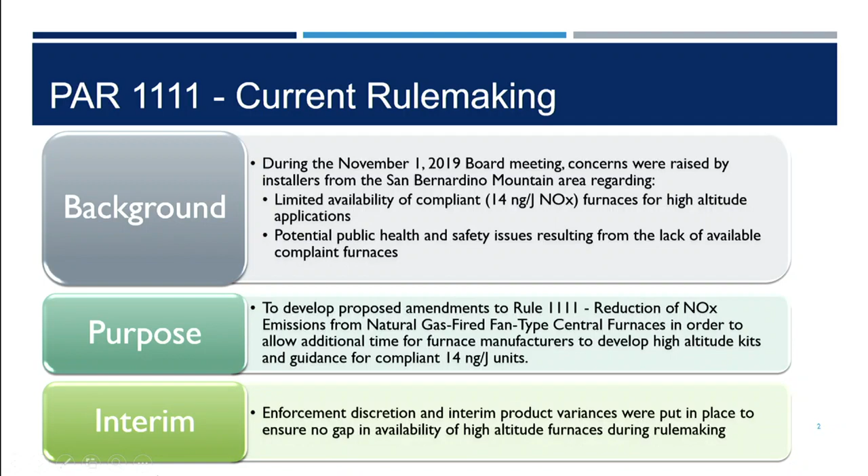So we're here to propose some amendments to that rule in order to allow some additional time for manufacturers of the furnaces to test and develop the necessary kits and guidances in order to operate these furnaces in high altitude areas. Just by way of background, so everyone knows, during this whole interim, when the final compliance date came on board October 1st, we did have some enforcement discretion, as well as interim product variances, I'll get to in a moment, that were in place to ensure there wasn't a gap in any of these areas to stay warm.

For those possibly not familiar with Rule 1111, we have regulated furnaces in our region for around 40 years, back to the late 70s. We established a standard at 40 nanograms of nitrogen oxides per joule of useful heat delivered to a heated space. Those limits were on the books for about 30 years until new technology came into play, and we then required 14 nanograms per joule. In order to give assurances to the public as well as to manufacturers, we did a technology assessment over those years. The conclusion was that those 14 nanograms per joule furnaces were feasible.

The following year, in 2014, when the furnaces needed to start to be sold, the manufacturers came to us seeking additional compliance time, which we did provide. We also added a mitigation fee to encourage those manufacturers to accelerate deployment. In 2018, they again asked for another extension, which we provided, and revisited the mitigation fee as well. We also came back to the Stationary Source Committee and the board earlier this year to remind everyone that the final compliance date of October 1st, 2019 was approaching, and we got the board's support. In the interim, we kept monthly calls with the manufacturers, monitoring their progress.

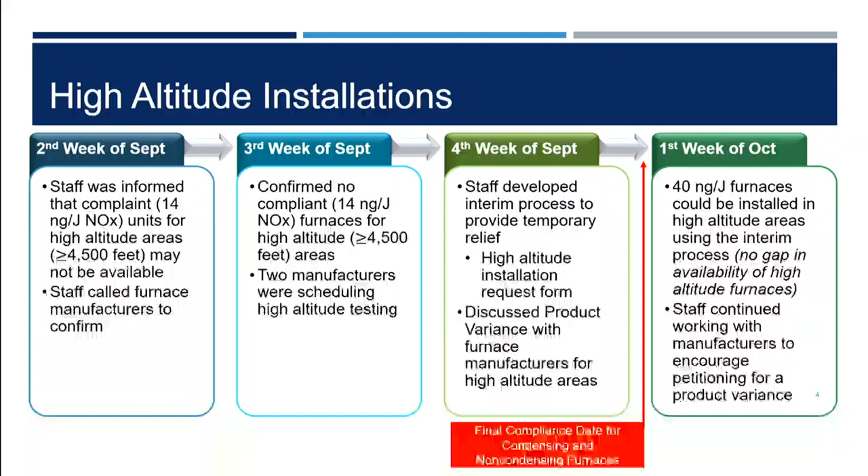Come the first week of October, we had the form in place. We were approving those forms, and furnaces were being installed in the high altitude area, again working to ensure there was no gap. With regard to the status of the product variances, we placed it out here. Actually, there's been an update since we posted this. Johnson Controls has now been granted an interim variance as well. So of the 7 manufacturers of furnaces, 4 are currently operating under product variance for this particular area.

The 3 remaining manufacturers have not taken any action on variances. We'd like to report that none of those manufacturers were part of the requests that we received in the high altitude area during the enforcement discretion period.

So Supervisor Rutherford, whose area she represents, took a leadership role in representing those folks. And I think that's why she raised the issue at the board meeting, but also encouraged a meeting which took place with staff and those high altitude installers, for the lack of a better terminology for them. They discussed implementation issues of both the product variance as well as the proposed rule. The comments were made from the language that we had come up with by the time we had that meeting on the 7th. So we're really talking a short window here between the 1st and the 7th.

That the proposal that staff had at 4,500 foot elevation should be changed to consider the fact that once you reach that high altitude area, that ledge up there, some of those areas vary in elevation. For example, Crestline could actually go as low as 4,200. And even though manufacturers will have compliant units in theory for that elevation level, it's a real challenge for those installers up there to make that differentiation between you're at 4,200, I go a couple blocks away, you're at 4,500. So we understood that, we recognized that, we sympathized that, we changed the current proposal to 4,200 feet.

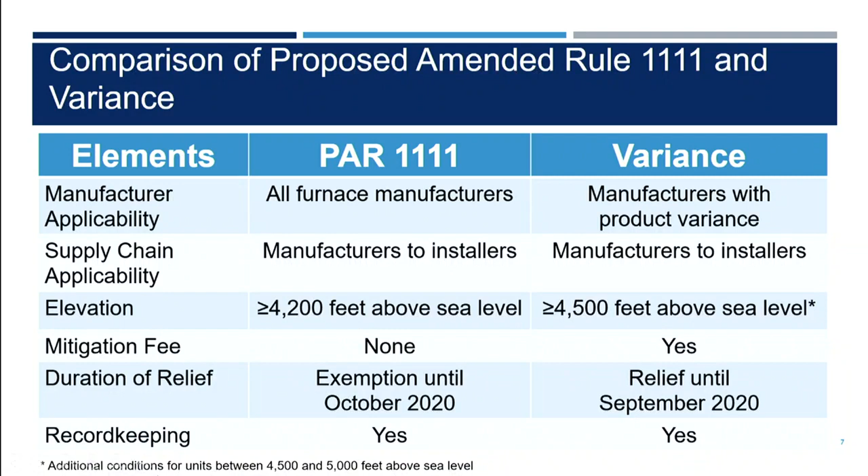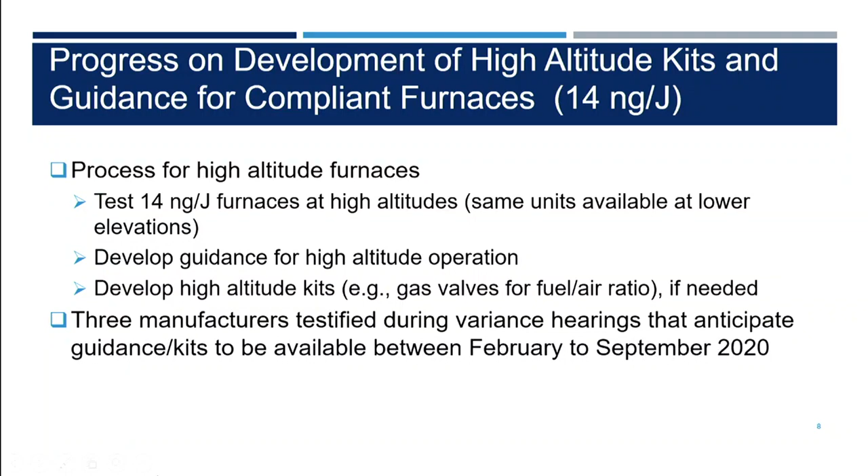Okay, when we talk about these high altitude units, I think I touched on it already, they have to be tested, there's guidances that are created. Sometimes there's kits that are created depending upon the manufacturer and the equipment. These kits could be hardware, software, things like that. But just to remind everyone, when we're talking about these units, they're not reinventing the actual unit. These are the same units that are being operated in the low basin region. They just need some tweaking. And again, an update here. Now we're talking about 4 manufacturers who have tested and granted variances.

So what are we recommending? We would like to amend the rule in December to allow all manufacturers to sell those non-compliant units in the high altitude areas until October 1st, 2020. We'd also require a series of just record keeping, this is not reporting, record keeping, to manufacturers, distributors, and installers, because each have a different role to play. And then finally, we propose wording in the resolution to direct staff to report back again to the Stationary Source Committee on the development of those high altitude and the weatherized units.

Public process: yesterday we had our workshop, and we got some good feedback. We also are going to be having a local public consultation meeting next week with Lake Arrowhead. That was, I believe, a suggestion from Supervisor Rutherford. I think it's a good suggestion, and we'll be up there next week with those folks.

And then we're right now in the public comment period. I know it's tight, but that's what happens when we move quickly on these things. And then finally, a public hearing in December. So that concludes my presentation.

Very good. I don't see any speakers at any locations, but maybe we have any there on this item? We have speakers, I believe so. Oh, very good. All right, we'll go ahead and call them up then. First speaker is Angus Lemon. Approach the dais.

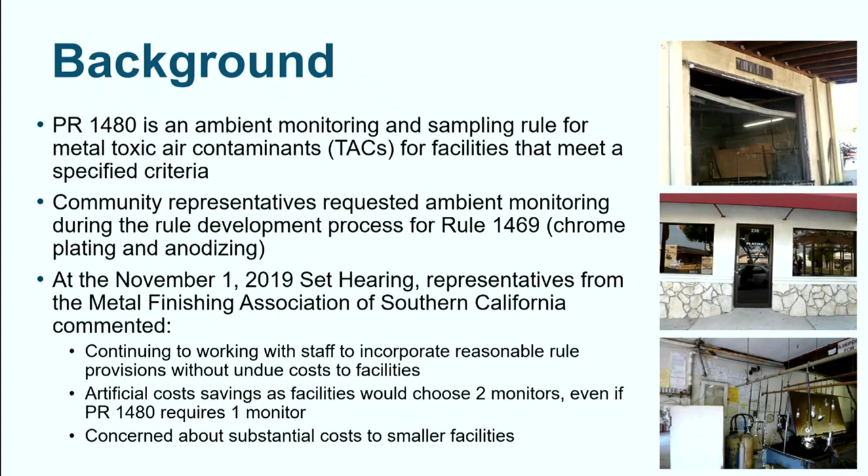There were comments about the artificial cost savings, where even though we require only one monitor, facilities would choose to have more than one. And there were concerns about the substantial cost to smaller facilities. And there was a request that we return to this committee to give you an update prior to our public hearing. So as a reminder, here's a general approach to 1480.

When we identify an issue area, South Coast AQMD would conduct the ambient monitoring and sampling, trying to figure out if there are elevated levels that are found, where are the sources at the facility, and the sources within that facility. Based on those investigative results, then through 1480, we would go through a process to potentially designate a facility. However, if we're unable to designate the facility, we may continue monitoring and sampling.

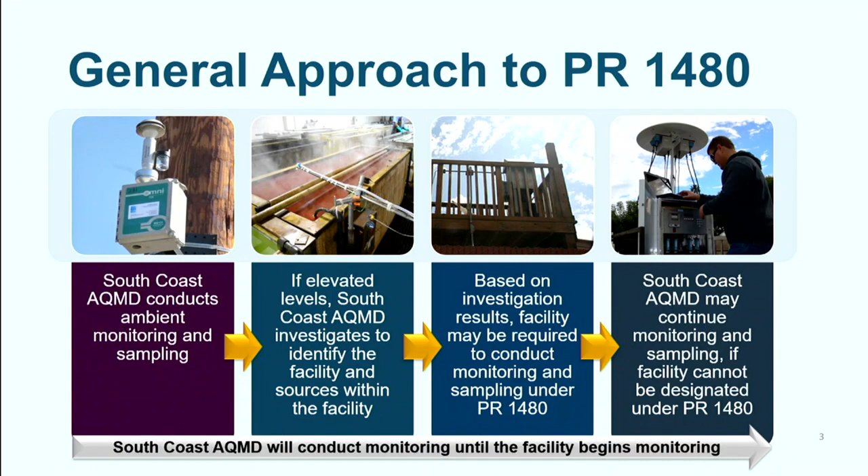Here's an overview of the requirements of 1480. As I described, first we have a process to designate a facility. Once a facility is designated, then the responsibility of continuing the monitoring and sampling shifts from us to that facility. At a minimum, they start with one monitor and a frequency of a 1 in 3 day sampling schedule. If they meet certain criteria, they're eligible to then reduce that sampling schedule to a 1 in 6 day or reduce the number of monitors. And finally, once they have fully implemented their 1402 risk reduction plan, then they can cease monitoring completely.

The rule also has provisions whereby if there are elevated concentrations that are found, they would have to notify us, and we can then do further investigations if we so choose. So our rule development process, it's been a public process, 11 working group meetings. We received 8 comment letters. There have been 6 revisions to rule language, and we had 1 public workshop where notices were distributed to more than 20,000 facilities and/or individuals.

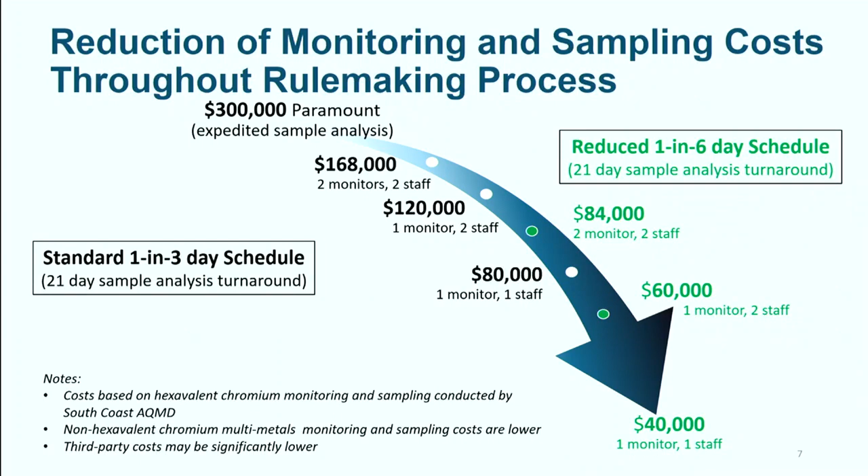This slide gives you an overview of the reduction in those monitoring and sampling costs from where we started and then to where we are today. A few points to note is that this is for a hexavalent chromium monitor, where the costs are significantly higher than if they were to do multi-metals. These are also our fees that we would charge if the facility chooses to have South Coast AQMD continue to do the monitoring and sampling for them. If they were to elect a third-party contractor, we anticipate that those costs would be much lower than our costs.

So a couple key issues that you heard at the set hearing. The first one was that there was an artificial cost savings by only requiring one monitor, that just because we have one, facilities will likely want two. Based on our experience, what they're talking about is an upwind versus a downwind monitor. And that is very useful in the investigative stages when we're trying to figure out where the sources are, either whether the facility is a source or the sources within the facility. All of that information is done by us.

By the time we get through the designation process and after we designate the facility, we really only focus on that one downwind monitor. The rule also has provisions that if the facility does not have the upwind monitor, they can still provide us with other evidence about activities that are happening in the vicinity of the facility that might be contributing to any kind of a high downwind monitor result.

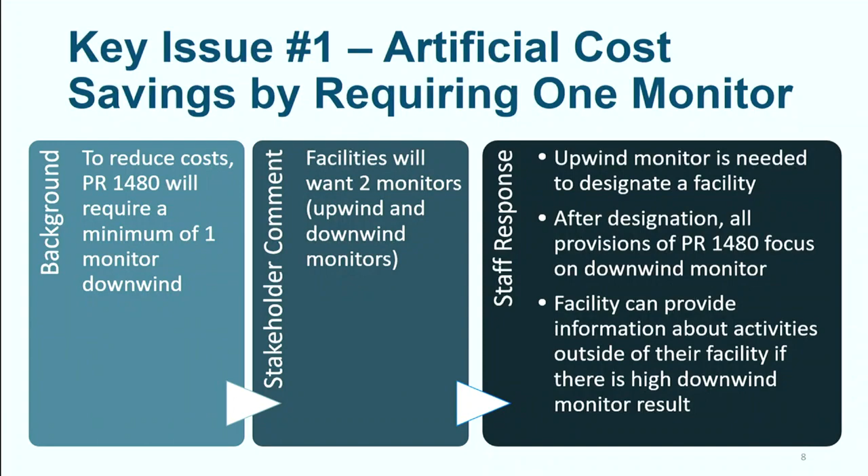And the other issue you heard was the high cost for small facilities, a concern that these costs would be too burdensome to the small facilities, causing them to either shut down or to leave the basin and operate somewhere else. And what we did in response to that was add an exemption for the facilities that are independently owned and operated, have 3 million or less in gross receipts averaged over 3 years, and have 25 or fewer employees. They're exempt from all provisions of 1480 except two.

One is that initial notice. Now that is the heads up that we would provide a facility that we're conducting monitoring and sampling in the area. At that point, the facility would then have the ability to provide us with information that they meet the criteria that we have listed. The other is an information request provision, and that just asks for information regarding the sources at the facility and also access to do on-site monitoring. Both these provisions are at no cost to the facility.

So with that, we are scheduled to take proposed rule 1480 back to the full board for consideration at the December 6th meeting. And that ends my presentation, and I can answer any questions.

And Susan's proud of you. I hope so. Yeah, we all are. How'd you do, Susan? Excellent.

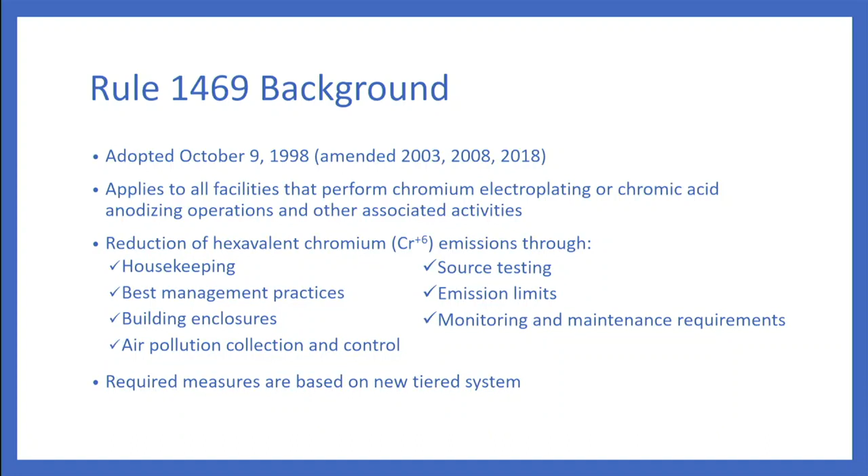Giving a quick background of the rule, it applies to any facility that has a chromic acid anodizing tank or chromium electroplating tank. The third amendment to this rule was the most expansive and now includes other associated tanks in the process line. The rule does reduce hexavalent chromium emissions through various requirements, including work practice, enclosure, and emission limit requirements. There is now a new tiered system which is based on the hexavalent chromium emission potential of these tanks.

There are 109 facilities in the Rule 1469 universe. These are fairly evenly distributed between the 3 facility types: chromic acid anodizers, hard chromium platers, and decorative chrome platers. The permit application deadlines in the rule are dependent on these facility types.

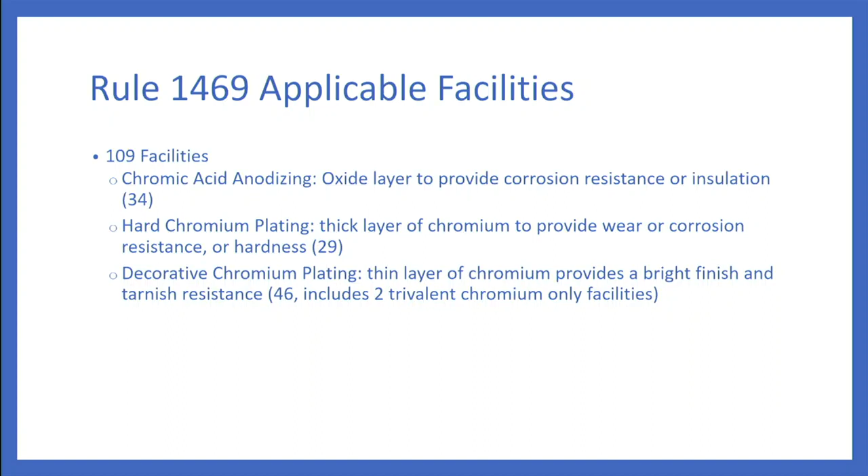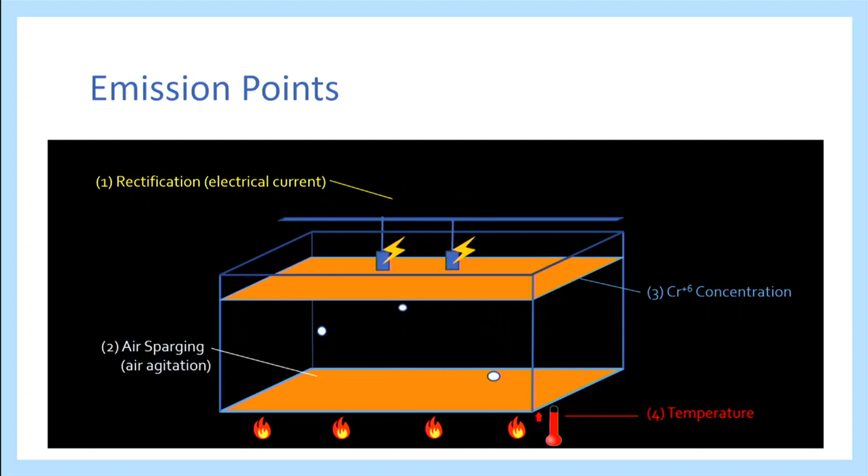Quickly touching on the tiered system, the emission mechanisms that the tiered system was based on are rectification, or the introduction of electrical current into the tank, and air sparging, which is used to mix the solution by bubbling air through the tank. Also, through rulemaking and source testing efforts, hexavalent chromium concentration and temperature were found to be contributing factors for the emission of hexavalent chromium. So these mechanisms were used to establish these tank tiers.

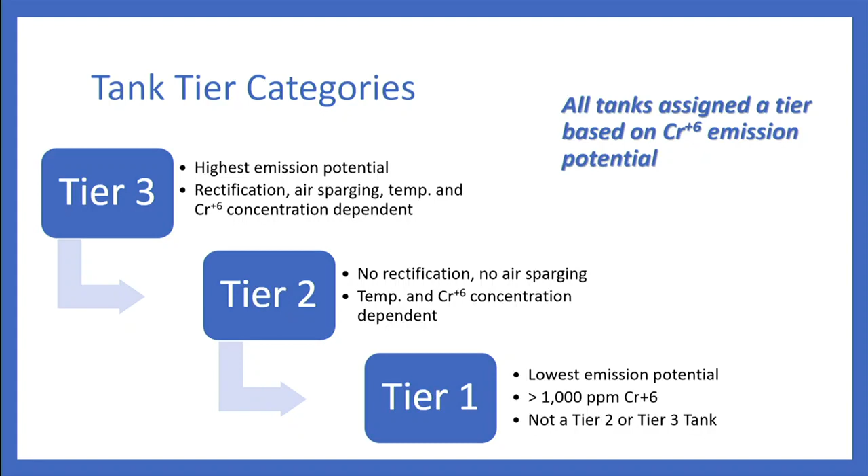All tanks in these facilities are now assigned a tier. The highest emission potential being the tier 3 tanks, which can have rectification and/or air sparging or high operating temperatures and high concentrations of hex chrome. The lower tiers, tiers 1 and 2, do not have rectification and sparging. Compliance and enforcement has been focusing on these tier 3 tanks at the outset of this rule.

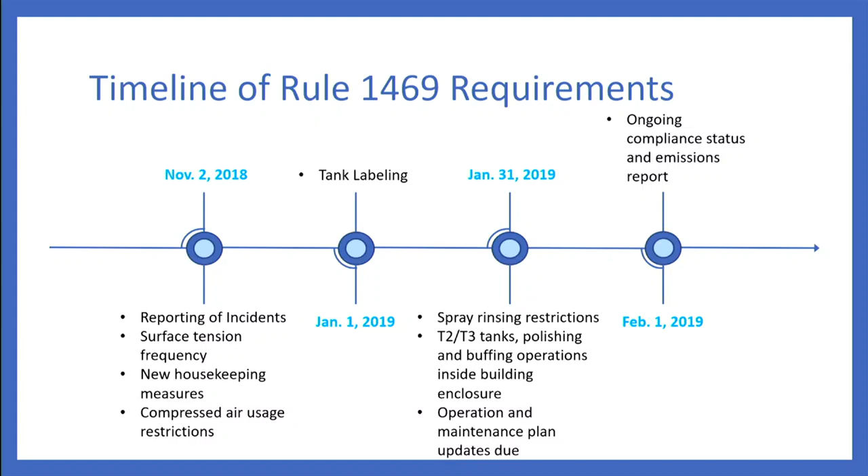Going through the timeline, there were several immediate and near-term requirements for the rule. There was fortunate timing of an existing requirement, the ongoing compliance status and emission report, which allowed facilities to evaluate their compliance with the immediate requirements, as well as look forward to the upcoming deadlines at the time for permit application deadlines, building enclosure requirements, and source test protocol submittal deadlines.

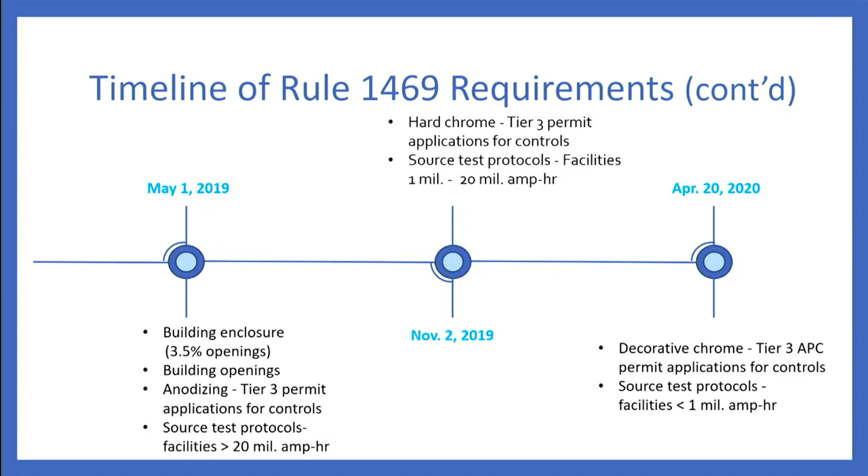The implementation is going well. Three groups are devoting significant resources to the effort: compliance and enforcement, engineering and permitting, and source test engineering. The effort started out with an internal staff training of inspection staff to ensure there was consistent enforcement and understanding of the rule requirements. Staff has committed to quarterly inspections of 1469 facilities, and 100% of those inspections have been completed thus far in 2019.

There's been a sharp increase of issuance of notices to comply. Those have doubled as inspectors are out confirming that facilities are complying with the requirements or asking for information regarding the new requirements. The counts in those notices to comply have increased tenfold as compared to the previous year prior to the amendment. Notices of violation have also increased from 2 to 8.

However, it should be noted that only 3 of these notices of violation are for brand new requirements of Rule 1469. There is a slight correction to the footnote. 2 of these facilities had issuance of a notice to comply prior to the notice of violation. The 3rd facility was actually operating under a permit to construct and failed to meet the timeline in that permit, but all 3 facilities were aware of the requirements prior to issuance of the violations.

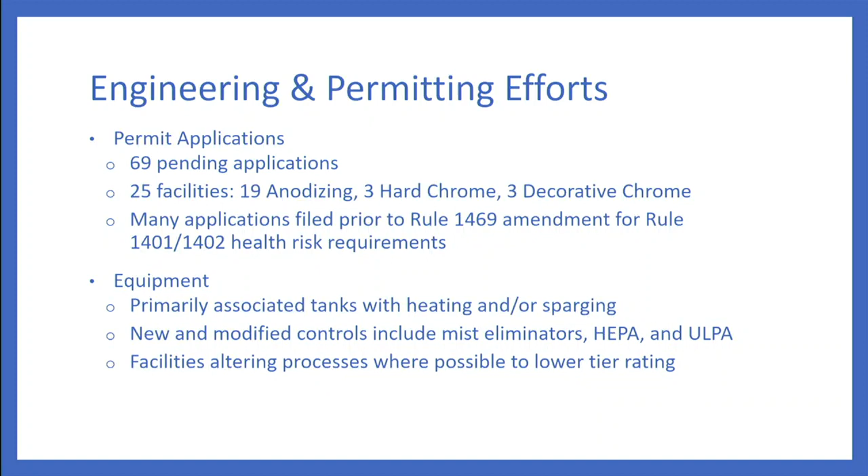I should expand on source test engineering: after a permit to construct is issued, the facility then has a year to install the equipment and demonstrate compliance with the emission limit requirements of the rule through a source test. So source test thus far has received several protocol submittals, and most of those have been completed, allowing facilities to move forward with their source test efforts.

The rule does allow for a previously existing source test to be used to demonstrate compliance if it was done after January 2015. The collection efficiency parameters established during those tests are currently being enforced by inspection staff. That is very important so that the system can maintain those same parameters and ensure those emission controls are operating at the same level they were tested at.

Some of the early lessons learned during this process is staff found it very resource intensive to communicate with the facilities as they mailed out compliance advisories and explained the requirements. In response to that, staff is currently developing a 1469 subscription list as well as a dedicated email address which will be monitored so facilities can have direct communication with staff regarding any questions, and staff can reach out to the facilities regarding upcoming deadlines or distribute future compliance advisories.

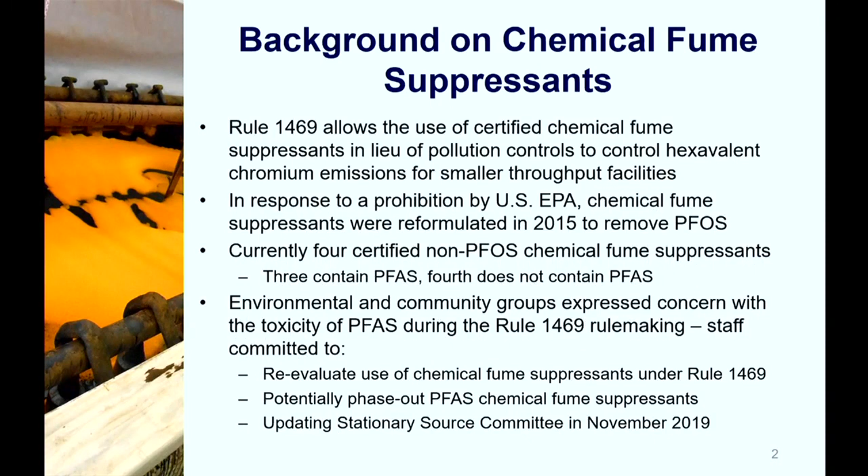As we went through the rulemaking process, there were concerns from the environmental community groups in regards to the use of PFAS in these chemical fume suppressants. It's been talked about with EPA, on a water quality issue also. So we did commit to reevaluate the use of chemical fume suppressants in 1469 and talk about a potential phase out. And so we're here today to provide that update.

So by way of background, PFAS is the umbrella for a variety of different chemicals, these long chain fluorine chemicals that are very stable, persistent in the environment. They're used in a variety of different consumer products. Probably the most well known is use in firefighting foams. It's been primarily an issue with water quality in drinking water, and OEHHA is working on looking at the health risk factors associated with PFAS.

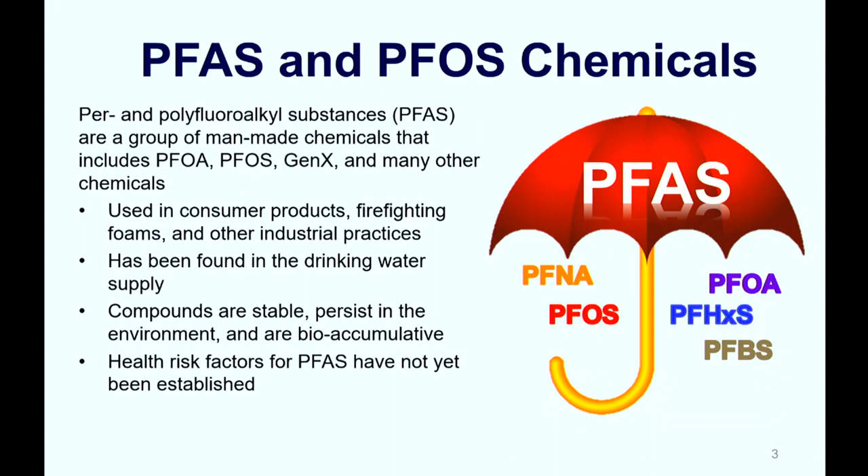So through the 1469 process, we did commit to conduct some emissions testing, and based on that emissions testing, looking at the health effects, we would then decide whether or not we were going to continue with the certification of these fume suppressants, and if we did, facilities can continue using the fume suppressants, and if we decided not to certify the fume suppressants, facilities would be offered 3 options.

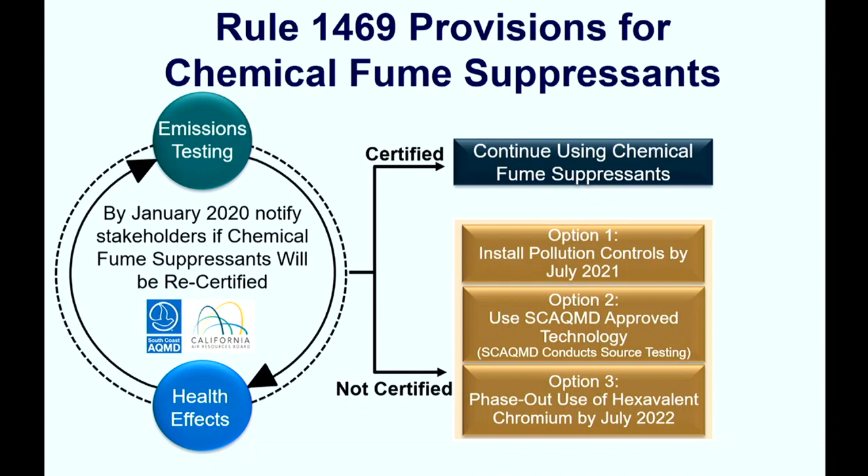One would be to install pollution controls by July 1, 2021. Second option would be that we would have some type of package certification of approved technology that the facilities could use. And the third would be that they phase out use of hexavalent chrome, could use trivalent or any other non-toxic alternative. And they would have till July 2022 to do that.

So just to summarize the results of the emissions testing, for the 3 chemical fume suppressants, we tested the chemical fume suppressant that had the highest amount of PFAS. That was the Macuplex chemical fume suppressant. The whole objective here is to look at the emissions from the air quality perspective, to quantify the amount of PFAS emissions that are coming off the tank. And what we found was the emissions were very small, 0.000775 milligrams per amp hour. And this is consistent with the use of the chemical fume suppressants. They use, depending on the size of the tank, on average 4 gallons per year.

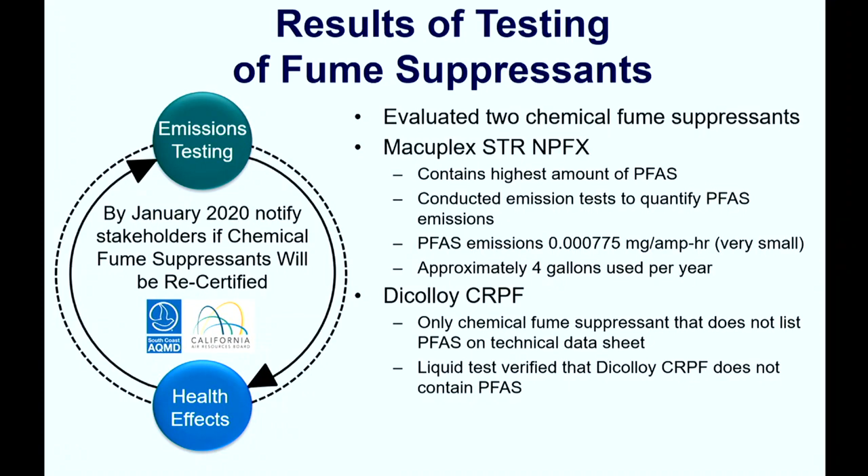We did also look at the 4th fume suppressant that does not use PFAS, just to confirm that there was no PFAS contained, and did a liquid test and did verify that the Dicolloy fume suppressant, the one that uses the cocamine, does not contain PFAS.

So there are a number of considerations with banning fume suppressants that we wanted to discuss. We did the emissions testing, and from an air quality perspective, the emissions potential is very, very low. But we don't want to discount the concern from other agencies in terms of water quality. And the chemical fume suppressants are very effective at reducing hexavalent chrome, which is a potent carcinogen, and they can reduce the hexavalent chrome by about 99% without the use of add-on pollution controls.

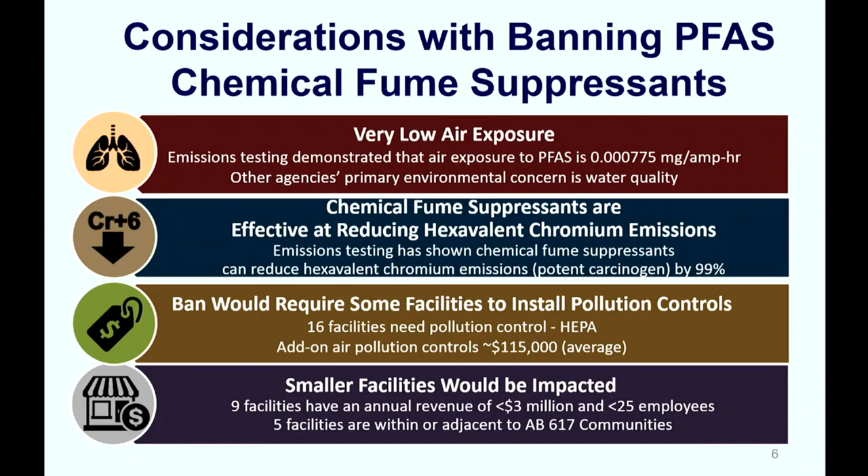And a ban on chemical fume suppressants for these smaller facilities would require the installation of pollution controls. We have currently 16 facilities that would need pollution controls if we were to ban the chemical fume suppressants. On average, the cost, depending on the tank size, would be about $115,000. These are the facilities that have the smaller throughput. They tend to be the smaller facilities. We identified 9 of those 16 facilities that had annual revenues less than $3 million and less than 25 employees, the same cut that we're using in proposed Rule 1480 as the smaller facilities. 5 of those are within the 617 communities.

The other consideration is the work that's being done, and we are very cognizant of the water quality issues and the concern from other environmental agencies in regards to PFAS, PFOA, PFOS, the whole gamut. And so we want to be cognizant of those other actions, but there hasn't been action yet. So staff's recommendation is that we want to maintain the certification for the PFAS, but it would just be a delay at this time. From an air quality perspective, the emissions are low. We want to see what happens with these other environmental agencies in terms of their actions for PFAS.

But in this interim, our thought is to establish an incentive fund for the smaller facilities to help them install the pollution controls. We feel like we're seeing the writing on the wall. We want to help these folks get put on the pollution controls in anticipation that there eventually will be some type of ban or limited use on PFAS. Then as we move forward and we look at this issue, if we need to ban PFAS, we're in a good place with these smaller facilities.

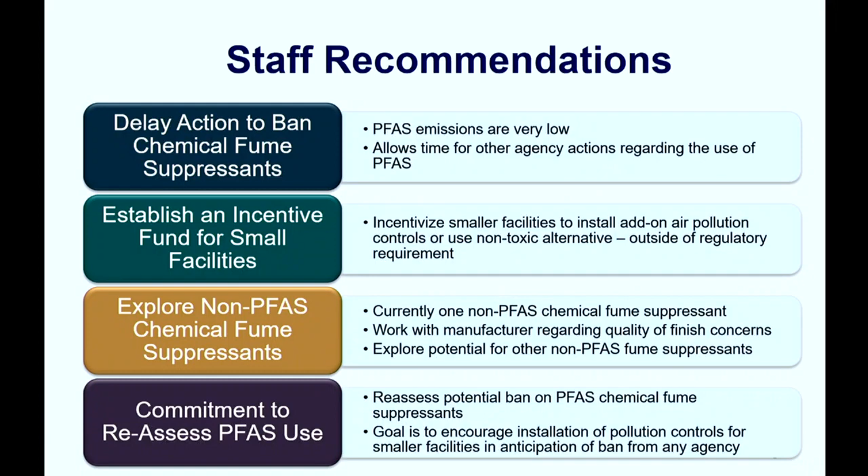We also want to continue looking at the non-PFAS chemical fume suppressants. We did talk to some of the users of the non-PFAS chemical fume suppressants. Some were very favorable. However, some that were using the non-PFAS fume suppressant did move into another fume suppressant. They did see some streaking and some issues on quality with the non-PFAS fume suppressant. We are committed to reassess the use of PFAS and would come back. That's sort of the incentive for the smaller facilities to move forward if we were to establish this incentive fund.

So next steps is that we want to notify the facilities that there would be no change in the certification of fume suppressants, hold a public workshop to gather additional input, and return back to the Stationary Source Committee with more details on an incentive fund and other agencies and their actions, and try to coordinate with CARB and water agencies to see how we can move this thought forward. So that concludes my presentation.

All right. Do we have any comment cards on this one? There's one speaker here. All right, unless there's a board member question or comment, we'll go ahead and go to that.

Figure it's me again. Jerry Desmond. It's a triple play today.

Jerry Desmond with the Metal Finishing Association of Southern California. Just a few comments on PFAS. First is to know that we are engaged, as we talk about other agencies, with the water board as it starts to look at PFAS in drinking water. It's already looked at airports, looked at landfills, and we're engaged now with them directly. And what we're finding is the same as we see in the report in terms of the quantities that are used. Compared to the other uses, we're very small, and it's primarily a water issue, perhaps, and there will be sampling to figure that out.

But then secondarily, we see in the report the opportunity for the small facilities to perhaps engage and receive funding of some sort to get to the HEPA filters, and the leadership of our association would like to engage on that matter. It looks like facilities have been identified, and we now know what is being called a small facility from the other rule, and we'd like to engage to see, are those members that we can bring to the table and educate them in a way to be the initial pilot projects, then set the precedent for others. So we are interested in the opportunity. We appreciate it to move forward.

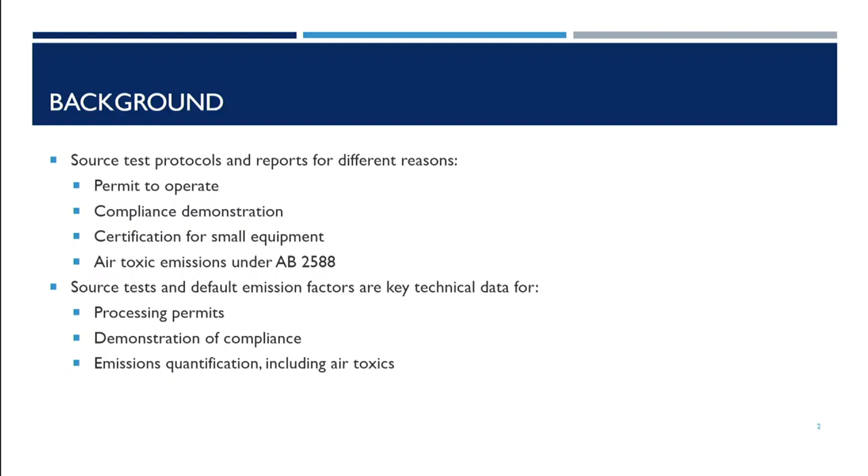So the EQUATE working group for the emissions quantification and testing evaluation was formed. And we had strong participation from stakeholders, including members from WSPA, Southern California Edison, different sanitation districts, and the Small Business Alliance. What I wanted to mention is that staff was already working on this resolution. We recognized that this was an issue. So we had some plans in development and had some initial work.

But what this group allowed us to do is get more input and present some of the challenges and give us impetus to move this plan forward to resolve those issues. And we were able to take some of their comments and address them through this working group and proceed now to give this presented plan.

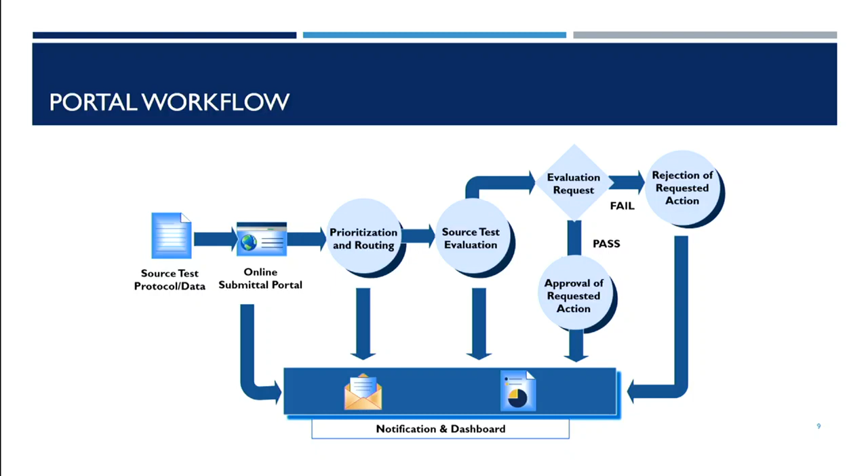And then as the submittal goes through the internal processes, there'll be an external facing dashboard to be able to show that progress, understand who to contact in case it gets stuck in a certain place, and be able to get receipts back to them whenever certain processes are being conducted.

So there's a lot of benefits to this that address the challenges that were set in the existing process to reduce the amount of delay to get back this important piece of information back to the facilities through the source process as well as the prioritization mechanism. So there's a lot of external benefits to that.

Internally, also having this tracking system to be able to route between the divisions, to make sure that there's less duplicates, and make sure that the appropriate units are reviewing it for the intended purpose is going to be invaluable for efficiency purposes here. So that will also reduce some of the delay that we've been seeing as part of our existing practice.

So some of our next steps is to form this subgroup specifically to gather input on the electronic data portal. We have already received a lot of good input from the working group for incorporation of the forward-facing platform of this portal. The second part is to develop that budget for this portal and implement the development of the portal with our friends from information management. And then this Equate working group is going to continue on to address the updates to the default emissions factors. And with that, I'll be happy to take any questions.

Board members, comments, questions? I have a question. Go ahead. Yeah, is this going to be a job for Ron Moskowitz? So yes, we are working hand in hand with his group. In fact, we had a representative from his group provide the overview of the test portal to the stakeholders, so we can gather that initial input as they start developing this working plan that then we can present to the subgroup of the Equate.